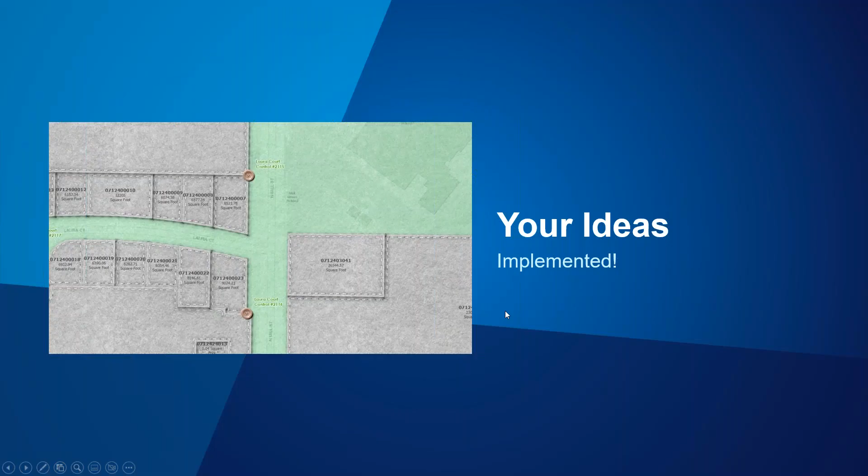A few more slides before we get to the demos. First thing we like to do every What's New session is to talk about the ideas on the Parcel Fabric community - what used to be called GeoNet, now called the community. You can see there's more ideas entered during the 3.1 release cycle. We used to have 17 ideas implemented, now we have 8 more, 25.

The total number of ideas has grown. So please keep doing two things: submitting great new ideas that you might have, and also voting on the existing ideas. That helps us prioritize which ones get implemented.

ArcMap is set for retirement. I don't have the exact date, but there's no more development happening on ArcMap. Everything is going into Pro, and we're encouraging everybody to move to Pro. I know it's sometimes a rough band-aid to pull off, but the editing experience in Pro is much better than anything in ArcMap. So I encourage you, if you haven't looked into Pro, to start moving that direction, because that's where we're putting all our focus. Maybe start by talking with someone who already moved to Pro, and that might help you make a decision. I think it's going to be deprecated in 2026, if I remember correctly.

The first demo — Jason, are you ready? Yeah, I'm okay, good to go. I will stop showing my screen. All right, and I will share my screen. I think, do I need to make you a presenter? Yeah, I'm doing that. Yeah, there we go. Okay, and then a tour too.

Should see ArcGIS Pro. Yep, we do. All right, cool. So I'm going to show a couple of quality of life improvements that we have for 3.1. One that I'm actually just going to show off script here is we've changed...

We've been constantly making improvements to our symbology and label expressions. You can see here that the record symbology has been slightly improved so you can visually see when records border another one. The top line here is a little thinner, but on the left-hand side where it's bordering another record, the line is a little bolder. That just means these two records are adjacent to one another at this point, so it's just an easier visual representation of the record symbology.

Another quality of life improvement, the other two are going to be all participating in a record-driven workflow. So let's go ahead and start the record-driven workflow like we always do by creating a new record. I'm going to give this record a unique name and click Create. Just like always, we have our active record displayed here on the top left in the record heads-up display.

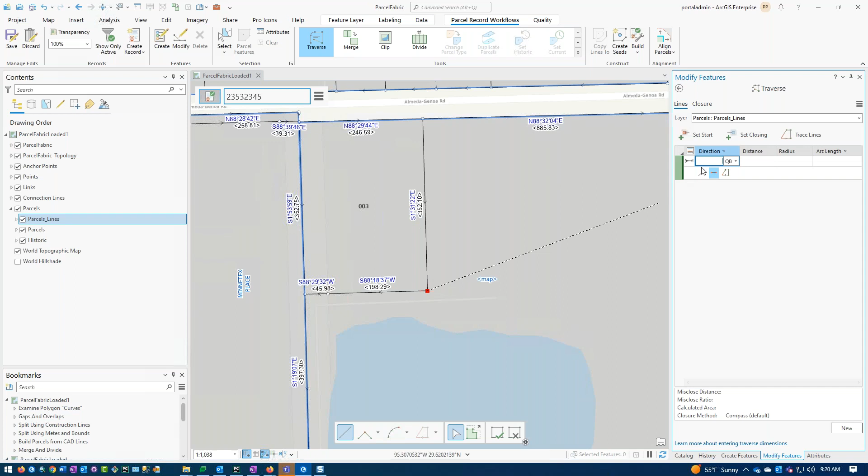You'll now notice that after I set my start location and type in the same measurements, 88, 18, 37, 1 to 200, as I enter in the lines, as I get closer to the edge of the screen it will automatically pan to the end of the line I've entered. This allows you to visually see where your traverse currently is, so if you've made a mistake in your data entry, you'll catch it right away rather than waiting until you're done entering your traverse.

So this keeps you in the current location. It doesn't zoom, it only pans, so you're just changing your map location, not your map extent like zooming in or out.

So these are just a couple of quality of life improvements, little things we always like to get into every release to improve data entry, small performance tweaks, or just things that make life easier for our users doing their day-to-day work. I think many of you voted on this idea to be implemented when we asked in the last 3.0 meetup, so here it is.

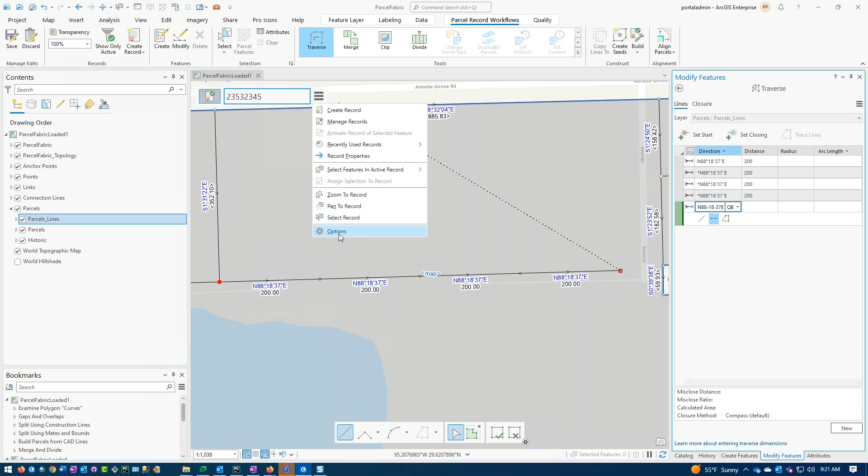If you like it, use it. If you don't like it, turn it off. I like my heads-up display in the small mode, I like to have it 16 by 16 icons. I do like the autopan though, it's great.

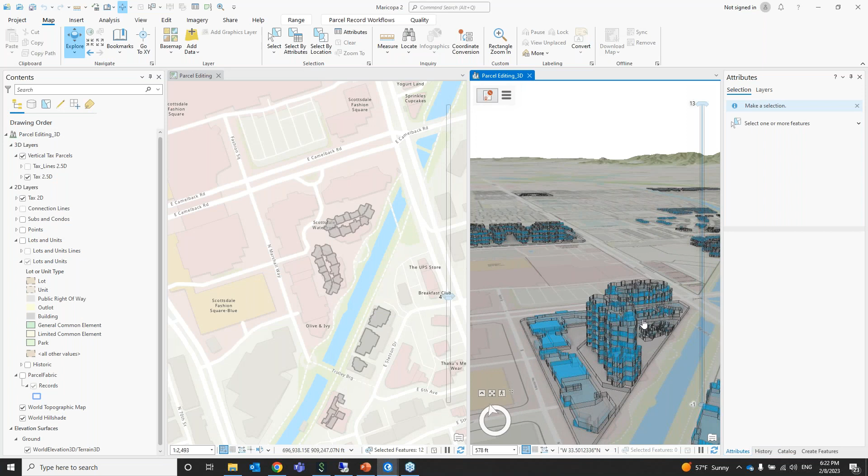Excellent. So the first demo is mostly to support the workflow of duplication vertically. Here we see Maricopa County, Arizona. They manage their condominiums with a field that specifies the floor number. You can see the floor footprint for the first floors might change as you go up, and there's a change on a different floor.

Let's see how we might enter one of those in Pro. It's much easier to enter—we're talking about 2.5D, not full 3D, or you can call it attribute-driven 3D. We use attributes like height, relative height to the surface, and extrusion height of the floor to drive the 3D symbology.

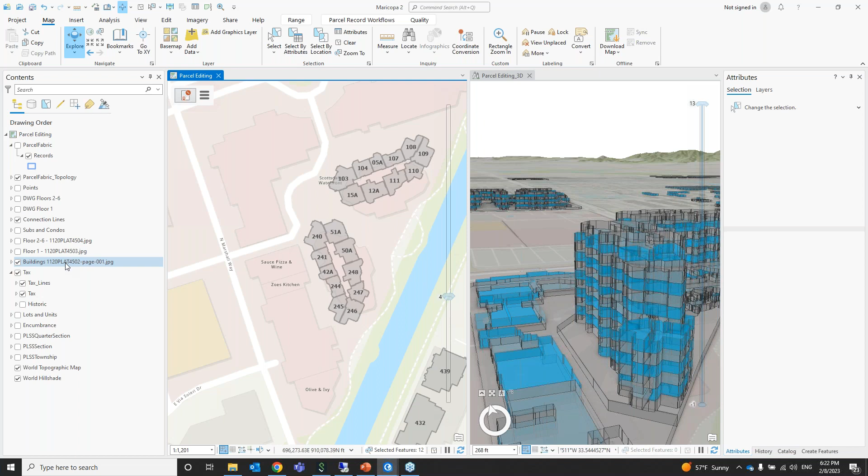Here we have a plat. Let's zoom to it, and we can see it specifies a new building. I have a bookmark that shows the name of this plat—Maricopa County, and this is called Safari Drive, with some more letters.

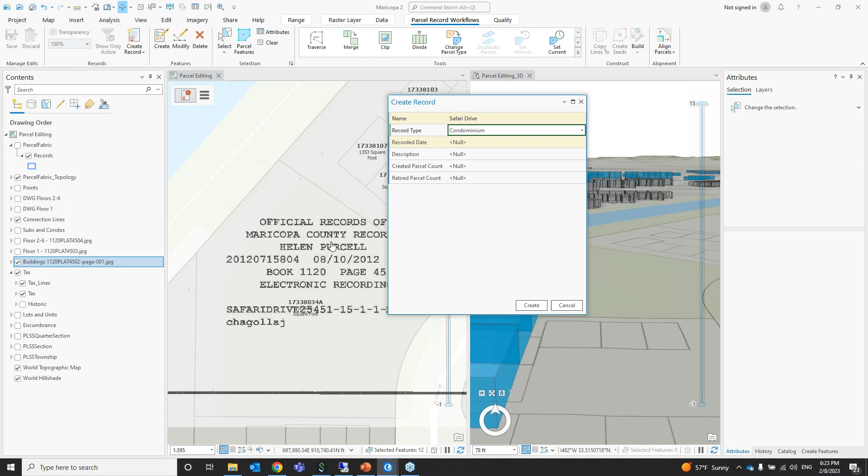So the first step in a record-driven workflow is to create a new record, which we'll create as Safari Drive. The record type you can define yourself—I'll go with condominium here. The recorded date we can fill in, but I'll skip that to save time. Now we have the active record, and I'm using the medium size as Jason showed.

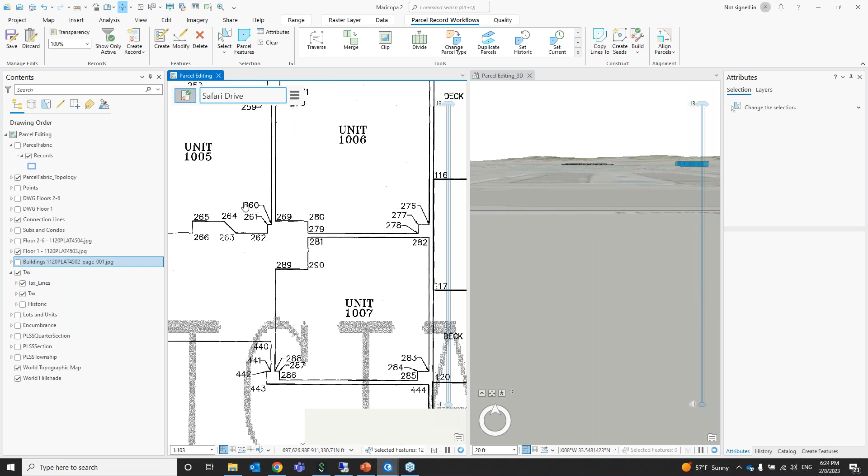Now we can look at the floor footprints—here's floor number 1. We can see units 1001 through 1005, 1006, then there's a limited common element, probably the entrance on this side. The units continue to 1008, 1010, and there's another limited common element at the back.

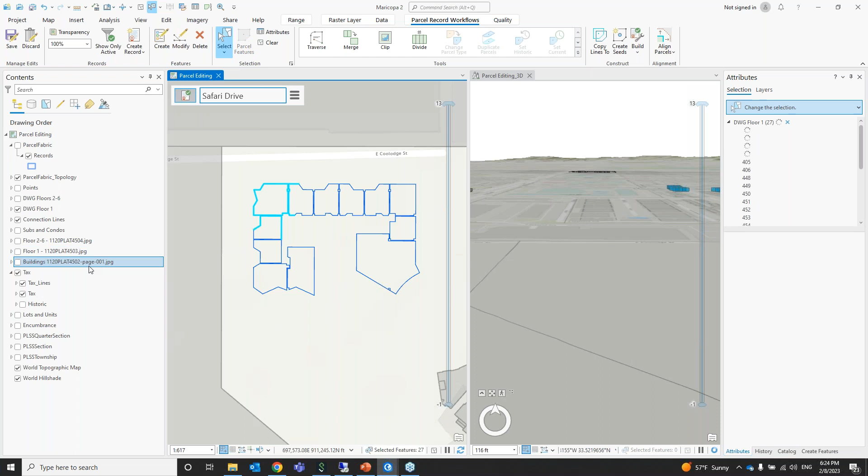Luckily we also have the DWG for this data, and I've already selected the lines I want to use to create floor number 1 from the DWG. When you select features, whether in a DWG or not, you can right-click and go to your selection—make layer from selected features. There were multiple layers in this DWG, and I've selected the ones relevant to use already.

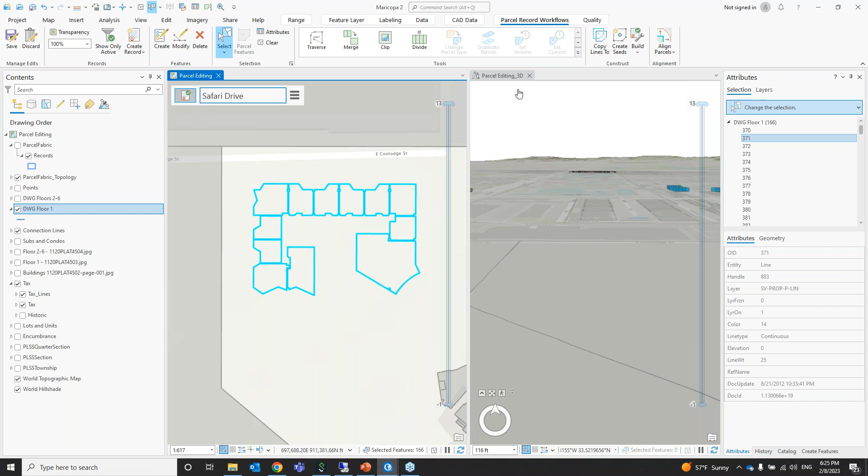This makes it easier to just select them and use them to create floors. So we use them to Copy Lines To, and we're going to copy them to the tax layer. Here we have it created, and we can turn off the DWG.

In order to make them floor aware, you need to add a field called floor order—a long integer, named floor order in one word. If you put this new field on the polygons and lines of a parcel type, they know the parcel type is floor aware. You don't need it for all parcel types, just the one you're going to duplicate vertically. This is how we associate the lines and polygons for each floor.

Right now that field is not populated. The way to populate it is to select the tax lines and say this is for floor number 1, then go to the polygons and specify the same. Now we know there are 4 floors for that floor group.

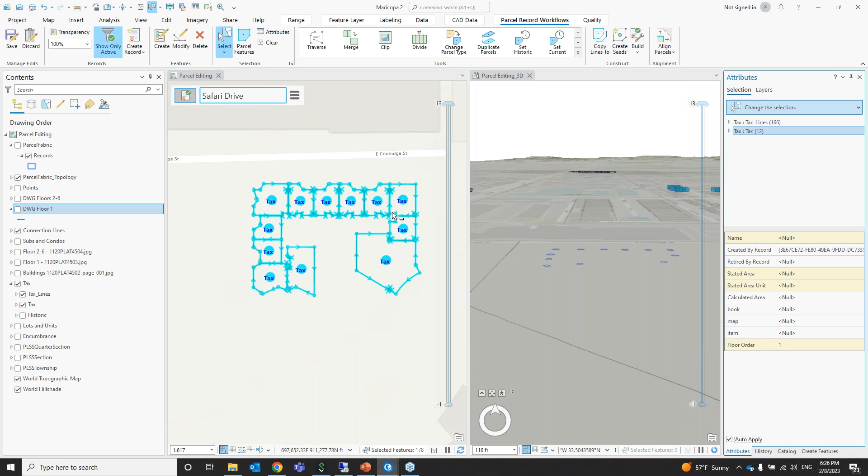We need to build them, so now we can just press build, and the parcels will be created. The next thing we can do is use sequential numbering on this layer—we're going to choose the correct layer, the tax, but not the tax lines, the tax polygons.

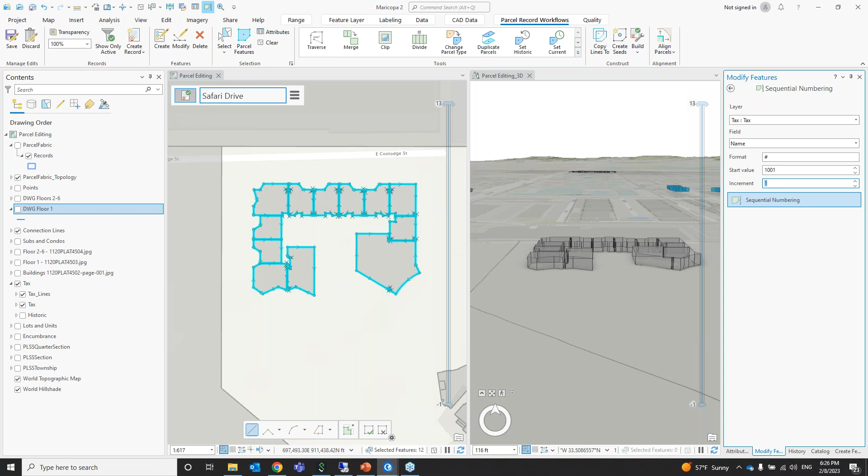And we're going to use the name field. The value started, we saw in 1001, and we incremented by 1. And we just can snake through that until here. So those are the first unit, and from here to here.

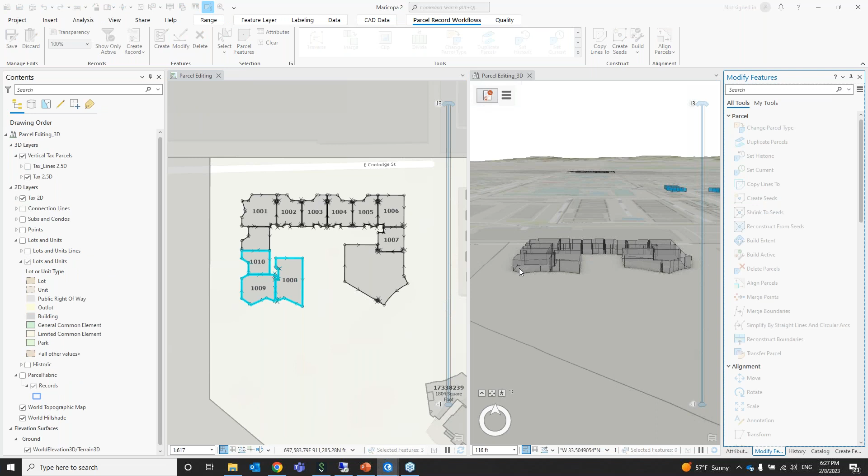And we should see the floor number have been updated. We can also see in the 3D view the representation for those parcels. We have the 3D scene view side by side with the 2D map view, and here we can see the floors are counting together. So let's continue to the next floor.

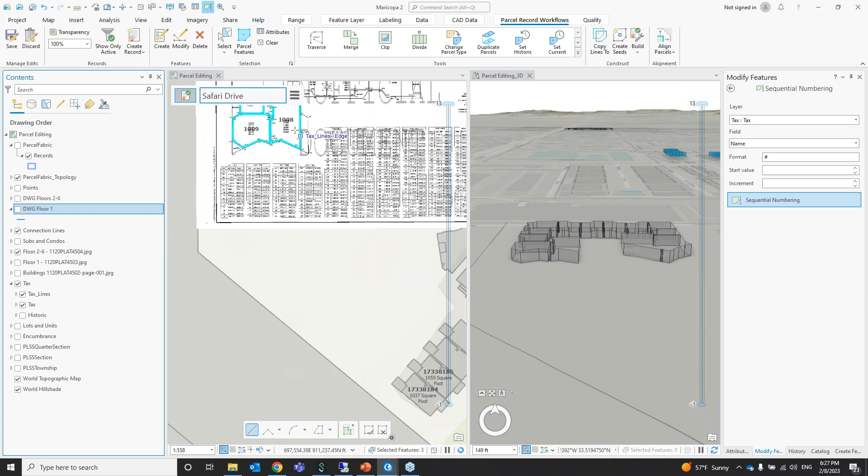We also have the DWG for the floors 2 to 6. If we look at that plat first, you will see that the floors repeat for the units from 2000, floor number 2 to floor number 6 here. So let's turn off the plat, and we already have the DWG for those floors. But the footprint is not the same in those floors, so it's kind of in our way.

So what I can do here is use the range slider on this layer to not see floor number 1. So here we moved it to subterranean floor, so we don't see floor number 1 now, and we can easily select the second floor lines. And we're going to repeat the same workflow, copying the lines to the appropriate parcel type.

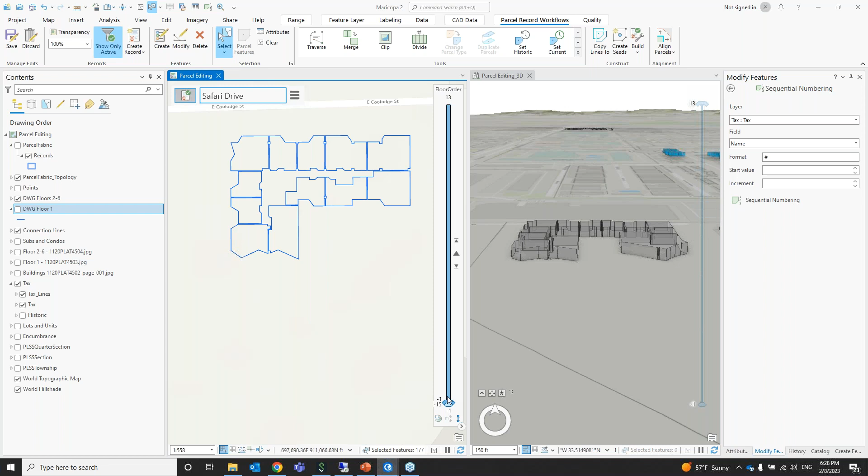Now that they've been copied, they have no value, so here they are. We can turn off the DWG layer, select the lines and the parcels, go to the attribute pane, and repeat the same exercise to associate them to floor number 2. By default, they are floor number 0.

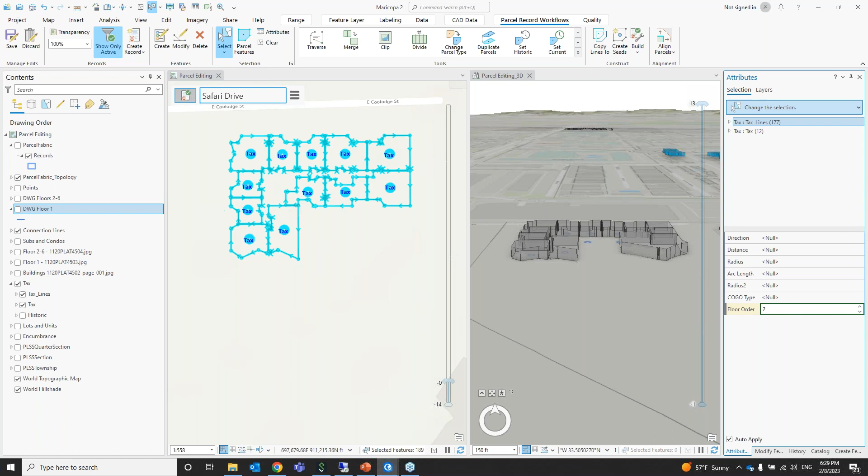So now we're moving them up 2 floors, and they will disappear because we are filtering out floor number 2. So we move them up, and now we can basically move to floor number 2 if we wanted to. So let's move up. Here we see floor number 2. And again, we can build the parcels again for that floor.

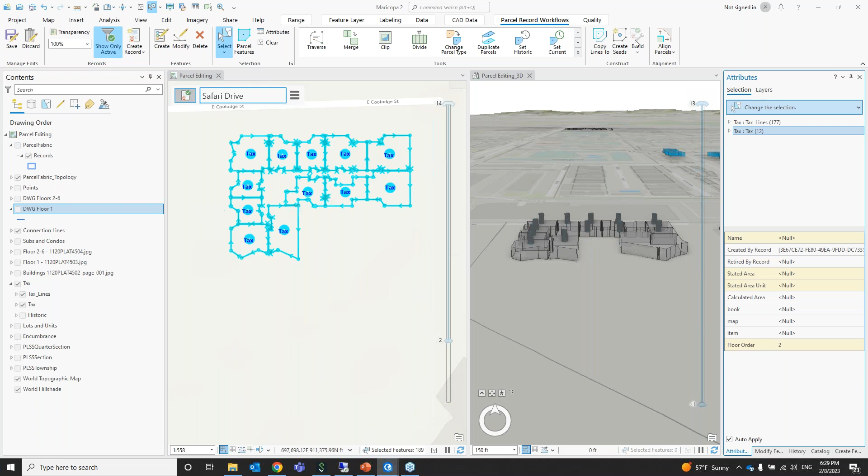And now we'll repeat the sequential numbering tool. We're going to start with value 2001, increment by 1, and it starts here. And there's no common element in floor number 2.

And we've done that, and now we probably want to duplicate that. So now the new duplicate parcels tool will recognize that these are floor-aware parcels, and they have a floor order, so the update field is already available for you. It's also smart enough to know that we are on floor number 2, so it's going to start with floor order number 3 and increment by 1 by default.

So the only thing we need to know is how many more floors we need to duplicate it for. We need floor number 3, 4, 5, and 6, so that's 4 more times, and press OK to get the other units in the other floors.

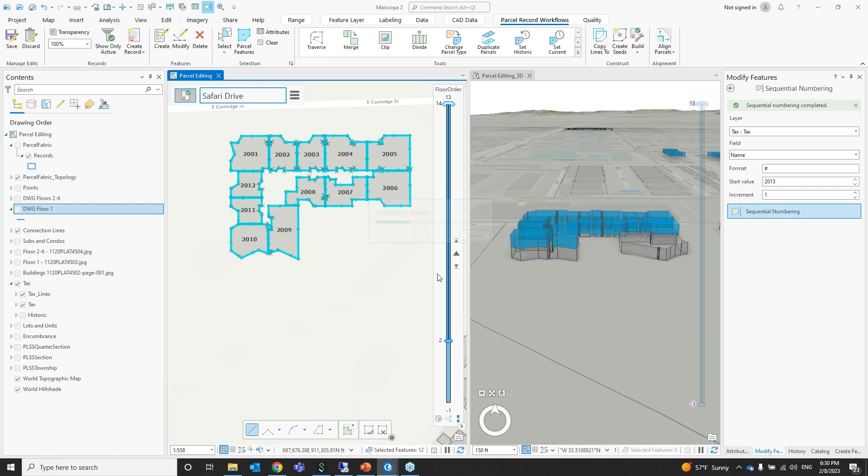As you can see here now in the 3D view, those floors have been created. So let me just go to the Explore tool, and we can see now the building in 3D has been created.

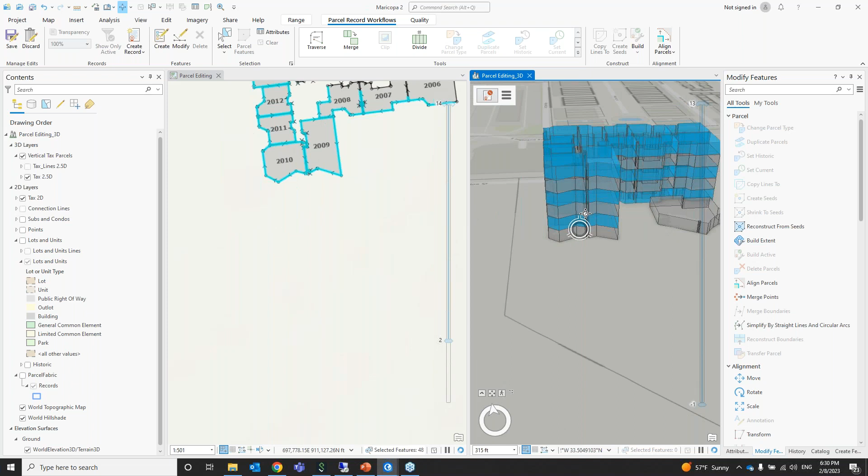We probably want to, in the 2D view, attribute each floor appropriately because we duplicated them with the wrong attributes, right? So if we just minimize that, we can just go floor by floor.

So floor number 3, you probably want again to start with the sequential numbering and make it 3001, increment by 1, and do that to have the appropriate floor numbers, and then move 1 floor up. Now repeat this process, which we'll skip now.

So if you are going to create this map in 3D, if you look, we don't need all the layers to be in 3D, just the layers of interest. So what you want to do is put most of your data in the 2D layers, so they are rasterized on the surface, and only the features that you want to see in 3D, put them in the 3D layers.

And for every layer, it's important to go to the properties and define the elevation. So you can see here we're using a custom expression in this case that basically uses the floor order to know the height at which to start drawing the layer. This can also come from a real field, so if you have the relative height to the surface you're using, you can specify that, and that's going to be much easier—just specify a field.

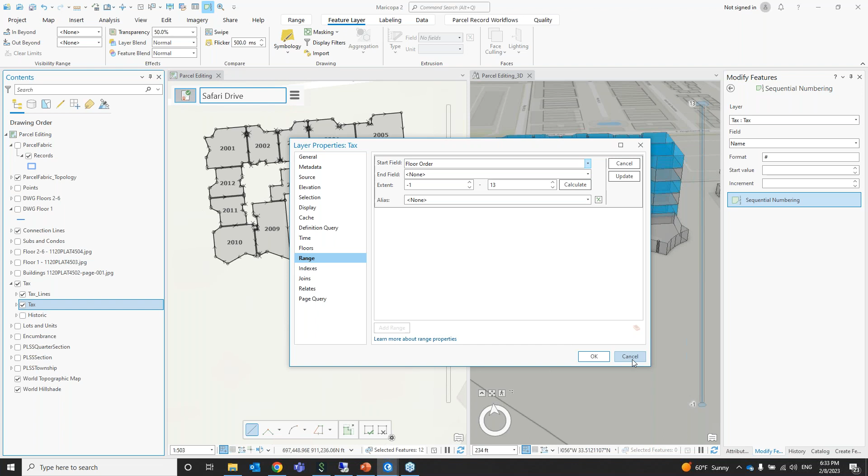If you wanted to know how to create this range slider, just go to your layer, press properties, and there's a tab here called range. You add a new one called floor order and specify this field, and it will scan your data and figure out the range you're using. You can also have them renamed if you add additional fields, and that's just standard ArcGIS Pro functionality, nothing specific to the Parcel Fabric. We've added two, one for the 2D view and one for the 3D view. So if you're getting into that, give us feedback on that.

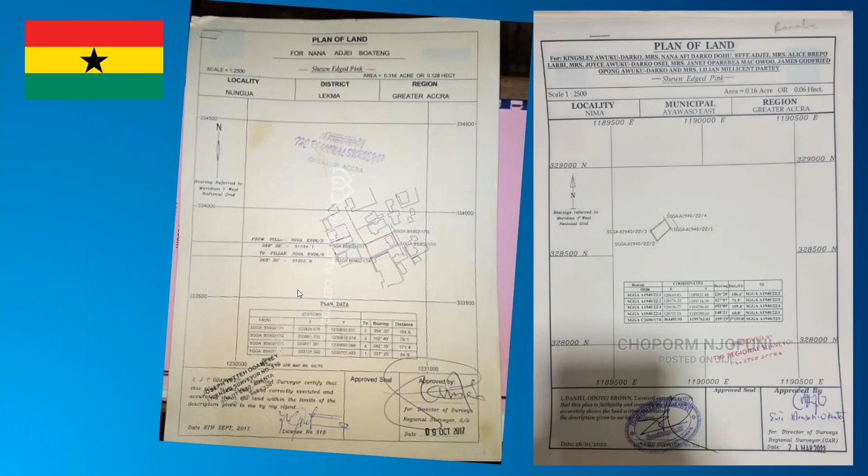We also saw in the community the same requirement coming, in this case, from Saudi Arabia. We also had a similar requirement from Colombia, and again you can see a map with a sequence of points, and here you can see the coordinates of those points. This is, I think, in Ghana, similar. This is a business partner of ours called Medeem that works in Zambia - again, similar concept, a map showing a sequence of points, but this could also be a sequence of lines.

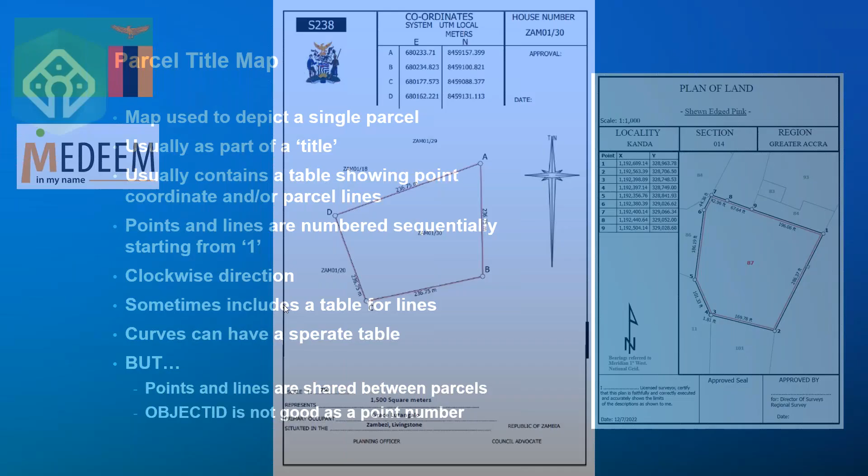So in order to create a layout that will allow you to create such a parcel report or title map, we wanted to make that process easier. Of course, this sequence for parcel 87 will not be relevant for the parcels adjacent to it, so it cannot be part of the schema.

Those numbers need to be per parcel. We also wanted to make sure those are in a working clockwise direction. You can also export the lines and have a line table that gives you, let's say, the COGO dimensions of those lines, and the ability to have two tables, one for curves and one for straight lines.

So the way we can do that now is using a new geoprocessing tool called Export Sequenced Parcel Features. The input for that is a parcel layer, and there should be only one parcel selected. If we have more or zero, we basically don't export that.

If you wanted to export many parcels, you can create a GP model and iterate through your features, but one parcel at a time is exported with all its features. So we export one polygon, the lines, the points, the connection lines touching that parcel, also the points touching those connection lines, the end of those connection lines or the start of those that are not touching the parcel, and any associated records to that parcel - the parcel lines could be multiple records - and of course any related data. So if you have annotation, attachments, or related tables, those will also get exported into a feature data set that you specify.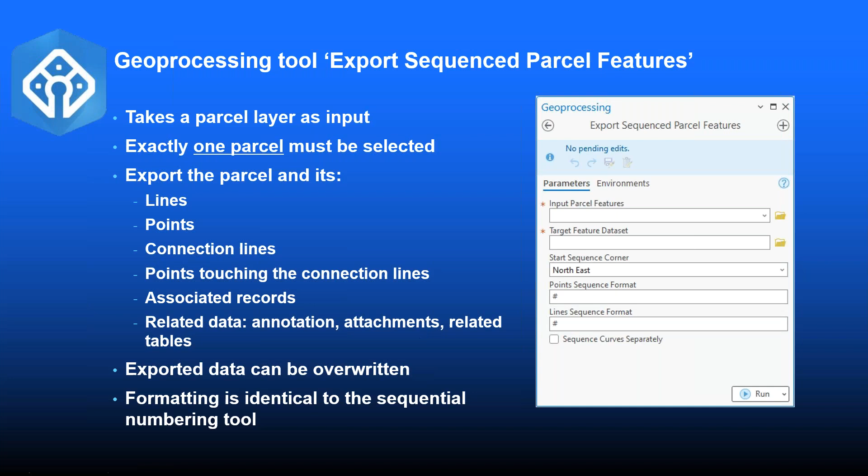If you wanted to pad it with 0 or start with an alphanumeric character, you can specify it here. So if you wanted all the points to always start with P and then 01, you would say P dash hash hash. That would be the format to have P01, P02, and so on. This was good, but you can also use that in a script tool.

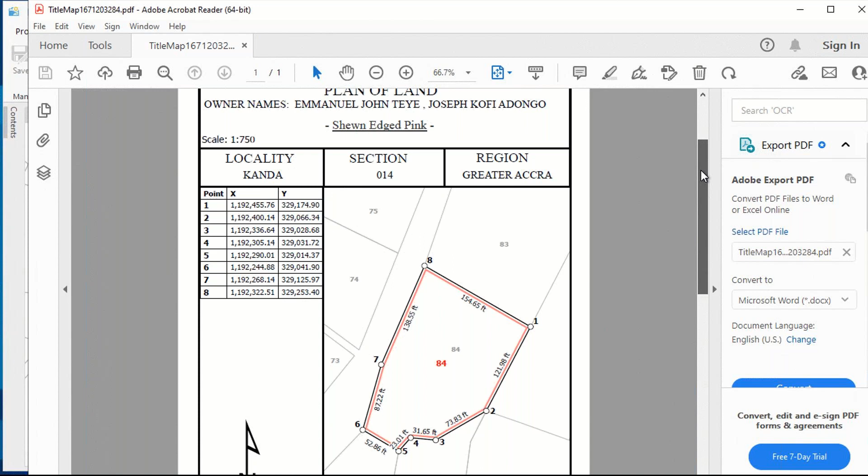In a script tool, like in this case, it will allow you to do more and even complete the workflow by generating a complete PDF. You can see there were also legal scales defined, so you cannot just export a feature and zoom to it, because there's a requirement to adhere to one of the available legal scales here.

And it will also export the PDF, so that's another Python command. When you press that, it will open the PDF. It also accommodates a situation where you have multiple layouts, each used potentially for different purposes. So as part of the parameters, you can specify the different layouts.

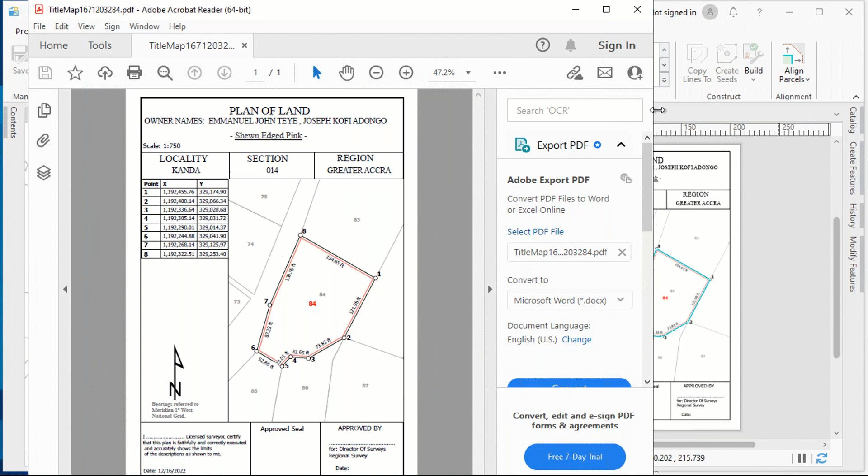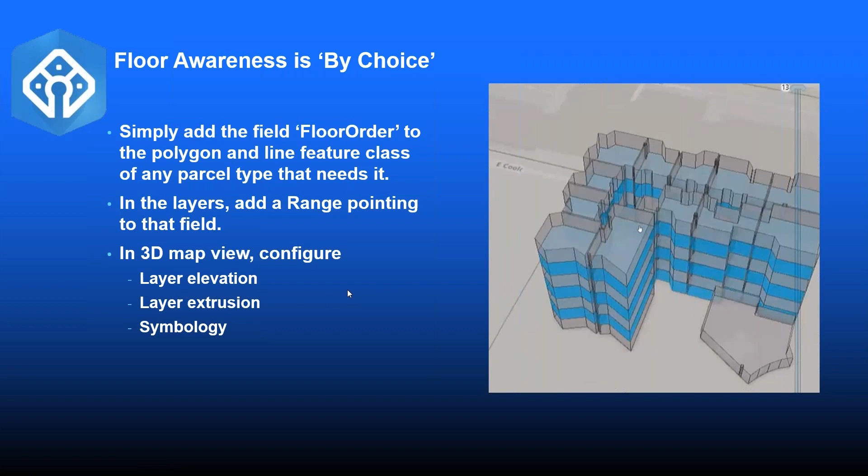We talked about this one. And again, floor awareness is a choice that you make - you can apply it for your specific parcel type, about how to configure things. I'll go over the slides before we hand it over to Tim.

There's also an enhancement to our REST API. We made the REST API able to run commands asynchronously. That is in part in preparation for what we call the online Parcel Fabric that we are also working on.

And one more demo here to show the export sequential numbering. There's still some bugs with that, so just bear with me. But if I had to create a layout that shows the exported parcel for this one, I would create a file GDB.

Then I would create a new feature data set - let's call it my title map or parcel report. I'll use the same spatial reference that is used in this map. And now we have a place to export the data.

Now that we have that, we can use the export sequenced parcel features tool. So the input, I'll take the tax parcels here - the one is selected here. My target feature data set is the one we've just created. I can specify where I want to start it, so let's go with the northeast.

And let's have all the points start with P dash, and let's pad it like we talked about, and the lines maybe L dash, same format - let's be consistent here. And we can choose to sequence the curves separately or not; I'll just sequence them together.

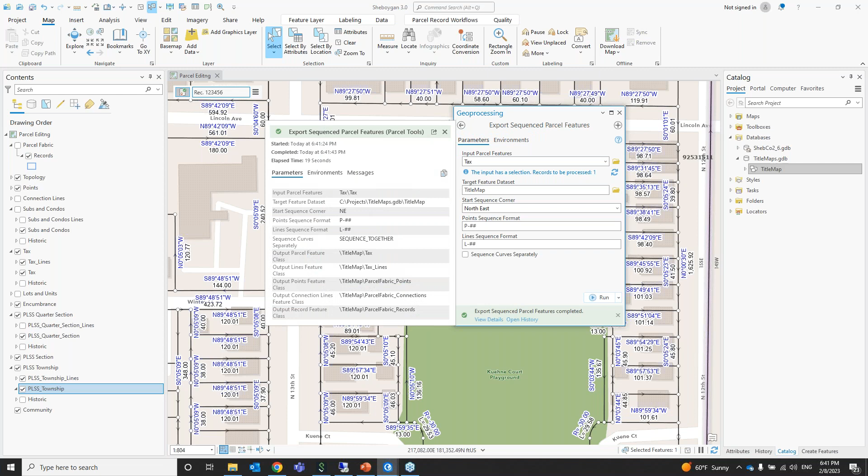Now we can choose what we want to do with this data. So we can right click and say add to a new map, and look at that map. So let's zoom - it's in Sheboygan County. We can also, might be easier, just zoom to layer. So let's do that, and here we see the exported parcel.

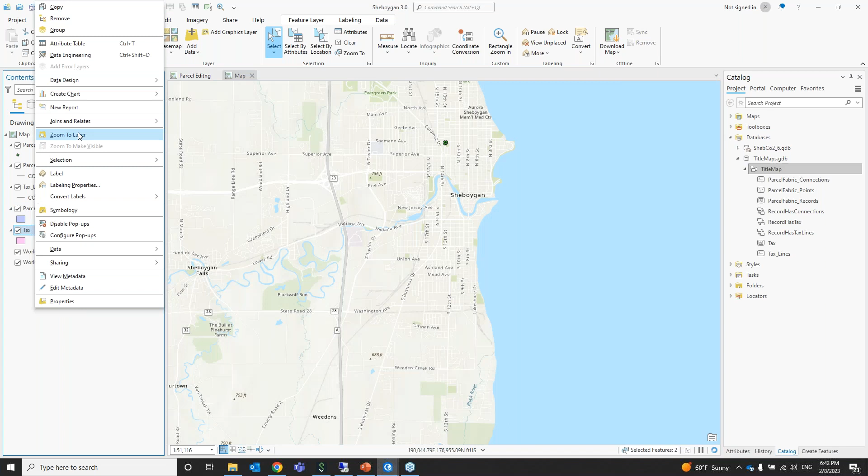So we can now symbolize it however we want, right? Let's say I want to symbolize it in that way, and I want the points symbolized in this manner, or this manner, as we might want to give the points a label. So now we have a sequence, a new field there called sequence. So we'll use that to symbolize by - let's make it bigger.

So we have those points sequenced, and we can do the same to the lines we just exported. So we can label the lines - they already have COGO, but if you wanted, instead of COGO, we can just say that we label it directly using a field. So label features in this class, we can just use the sequence field again, and give it different colors. You can see that here.

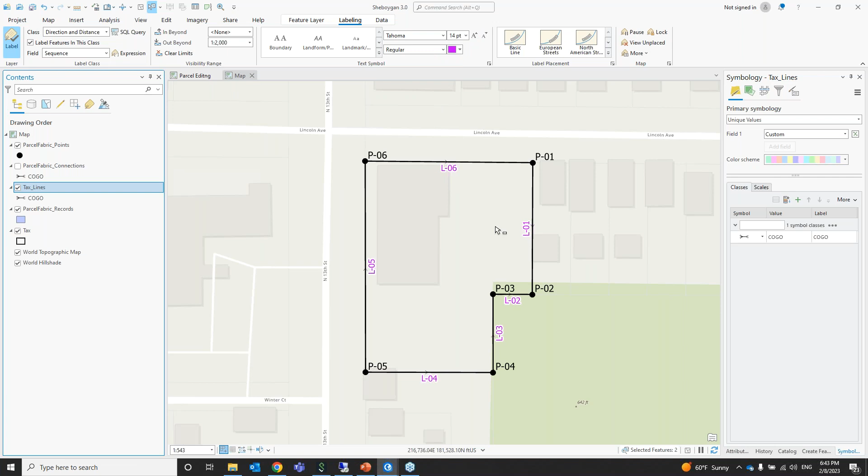And now that we have that, if I wanted to include this in a layout, I would give it a name - let's say this is parcel title or parcel report app - and you would insert a new layout. So let's create a new layout, and you can specify the size. I'm just going to go with a random size here, and it's coming out blank.

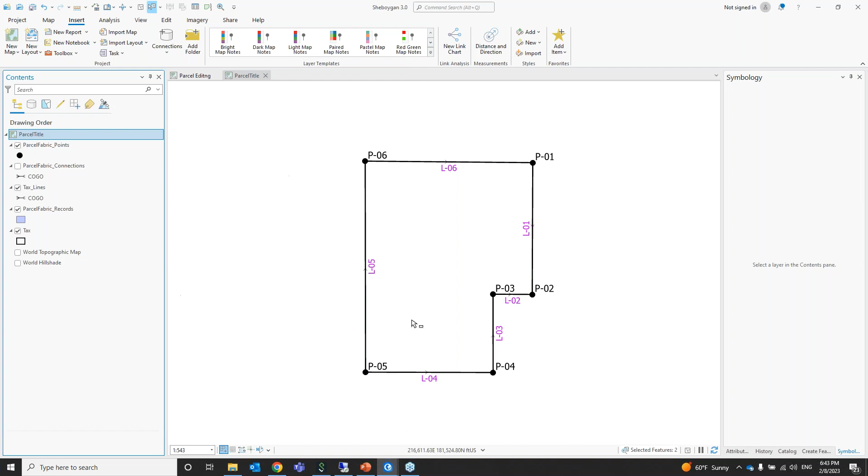And now we need to insert a map frame in here. So on the layout tab, you can create a new layout.

So the way to do that, where was it? I think insert. Here's the elements. Not a map series, it's a map frame. Here it is, and I can specify the one we just created. This would be step number one to create a layout.

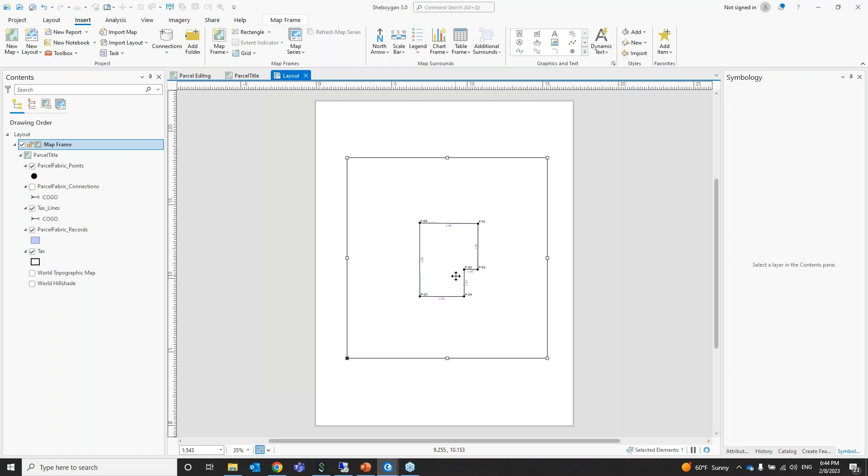So you can see the layout has been created, but of course there's no table in here. So if I wanted to create a table, I would create a new table frame element. Let's create that over here, and it's pretty small. I can double click on that.

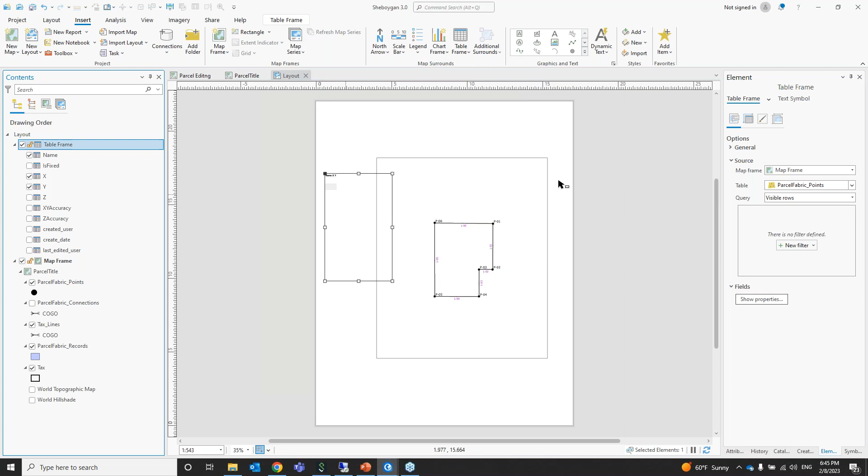And we can specify that it's coming from the points, but we don't want to see all the rows, just the name. Let's say even not the name, maybe the sequence, right? I'll specify now we don't need to see those fields, just the XY, let's say. And you can define the size of that.

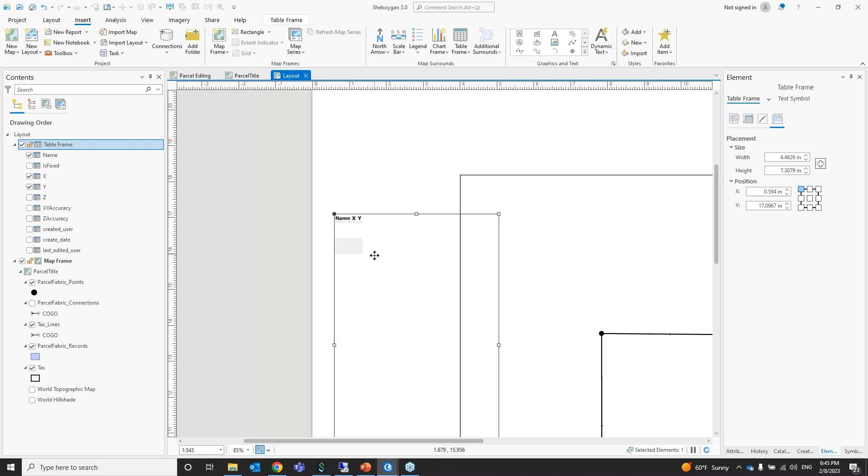So in here, you can specify the sorting. I'm not going to go and specify everything here, but this gives you the idea of how you would start creating this with a dynamic table in a layout and add all the other elements.

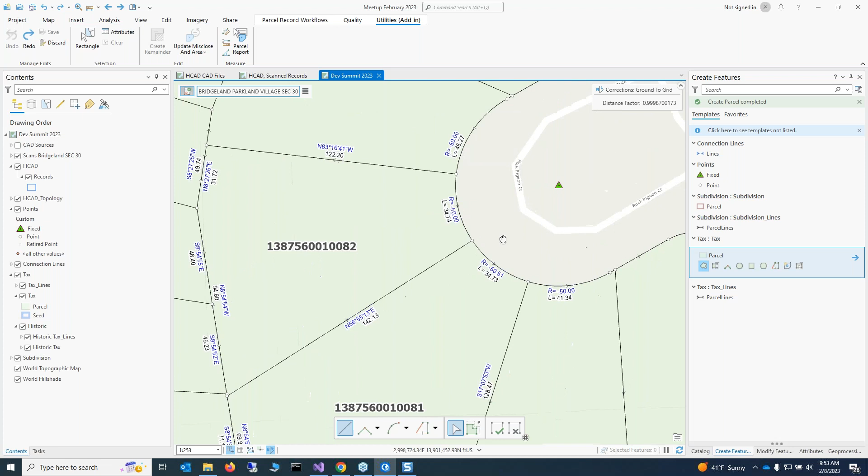And then lastly, this is an add-in that is already out there and available. I'm going to show what it does.

So let's say I have to create a connection line from this point to this control point. If I do that today, I right click and I say direction distance. And let's say I know my bearing and distance are these values, 50 feet. I hit enter and I get my COGO attributes and I've got everything I want.

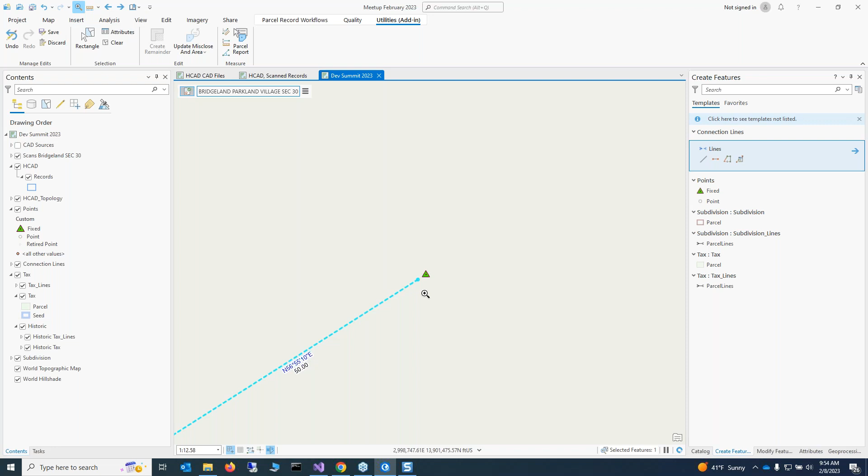But because I had to change the distance, we now have a little shortfall here. So in order to fix that, I'm going to have to build and then merge points and do all that sort of thing to make sure that they are connected.

Instead of doing that, there's a custom feature template here called COGO line. And what that does is it allows us to snap to the point, snap to the control point, and then there's a little checkbox here that says hold endpoint position.

So I can now say 50 and 10, and it creates my connection line for me. And it is also connected to my control point, so I don't have to worry about doing that additional work in the workflow. Also related to this tool is that instead of using tabs to go between the fields, like you do with the direction distance tool, you can just hit enter.

So I can enter and 25. And of course, in that case, it kept my last point fixed, but if I didn't want to do that, I could go like that and enter 30, then uncheck that box and it extends it to the correct location. If I do that again and want to go the other direction, I can flip the bearing around, or say -40, and it goes the other direction.

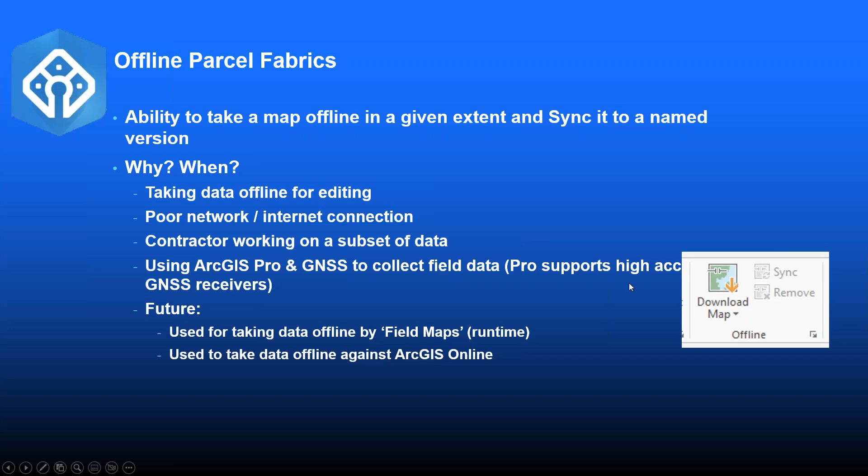We also heard the requirement that some of you have subcontractors that work for them, so that might be working well for them, they can remote and work locally. And this will also be the basis for workflows that are done in the field. So basically a runtime and field maps app to be able to take data offline and work on it in the field, and then sync it back to the named version or to ArcGIS Online. This is another thing that didn't make it in 3.1, but will make it in 3.2.

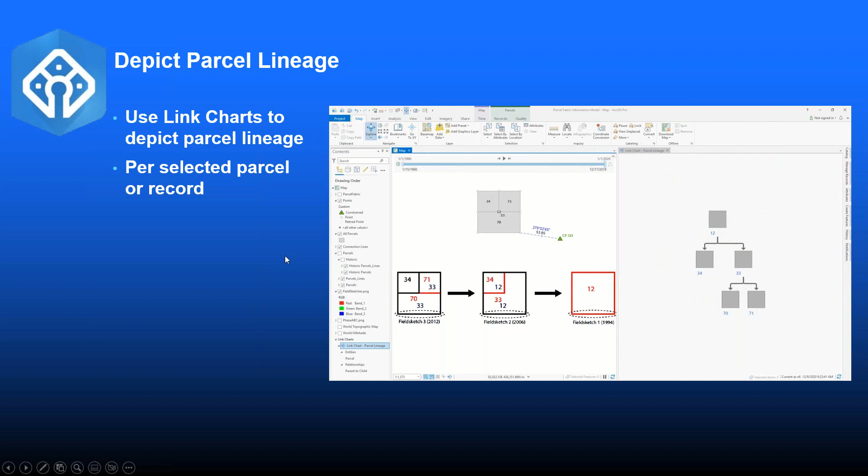Many of you put it as the first priority: the ability to depict the parcel lineage. So select a parcel or a record and see all the generations, parents, grandparents, and so on that relate to that parcel. This will leverage existing functionality in ArcGIS Pro called the link chart.

Another type of layout we haven't gotten to implement this release, but plan to do in the near term, is a parcel lineage map. Some of you call it the before and after, or the is and the was, basically showing the parent parcels and child parcels of a given transaction or record. You can decide to put that on the same layout or on two separate layouts, whatever your business requirement is.

We're probably going to follow the same pattern you saw before with the export sequence parcel features. That's going to probably be export lineage features or something like that.

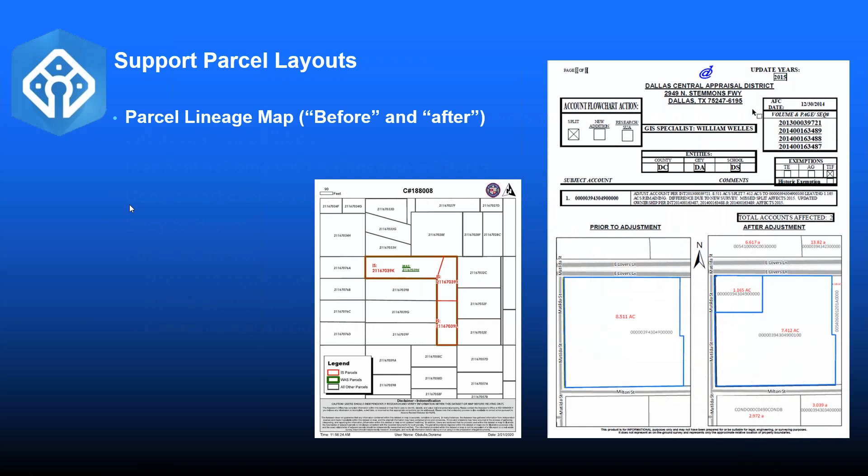Online Parcel Fabric is another big one. You can now deploy Parcel Fabric on ArcGIS Enterprise for multi-user editing or on a file geodatabase, but there's nothing in the middle. The online Parcel Fabric will be a Parcel Fabric on ArcGIS Online, a light deployment with reduced capabilities but exactly the same schema. So you could put it on ArcGIS Online and pull it back, and it will be basically the same Parcel Fabric.

Some clients will have to be smart to do the right thing. ArcGIS Pro is a smart client, so when you move a point, things move together. If you use a web browser, it will need to know about the topology to do the right thing.

Of course, ArcGIS Online is very easy to use. We think the customers who will use that are either customers that need fewer capabilities, or those that want a hybrid deployment, one on-premise and one on the cloud as SaaS, or customers that might find it difficult to deploy ArcGIS Enterprise.

If you want to know what we mean by reduced capabilities: there's no versioning on ArcGIS Online, no geodatabase topology centralized on ArcGIS Online, and attribute rules won't be available in the first releases, though that might come later. There's also no ability to run least squares adjustment, and no ability to perform complicated operations for 3D cadastre, like merging and clipping remainder using true 3D geometries. That will also not be available.